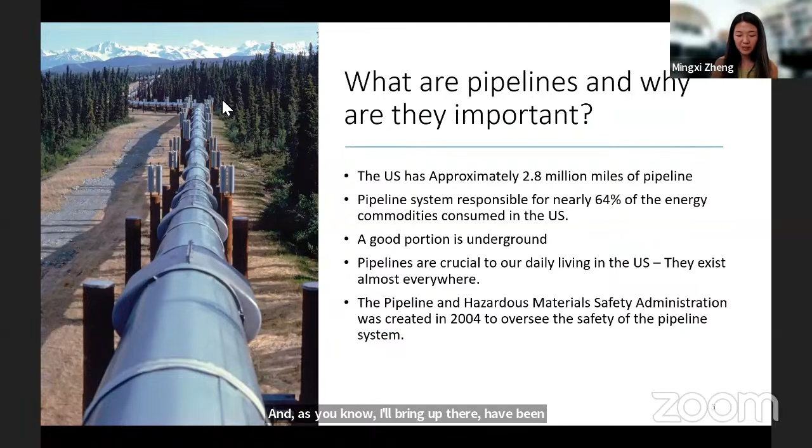So this is a government organization, and their main job is to ensure the safe and reliable operation of these pipelines, and create this check and balance system for it, because they are everywhere. And as I'll bring up, there have been incidences of pipelines causing fatalities and damage. So this here is from the American Energy Mapping.

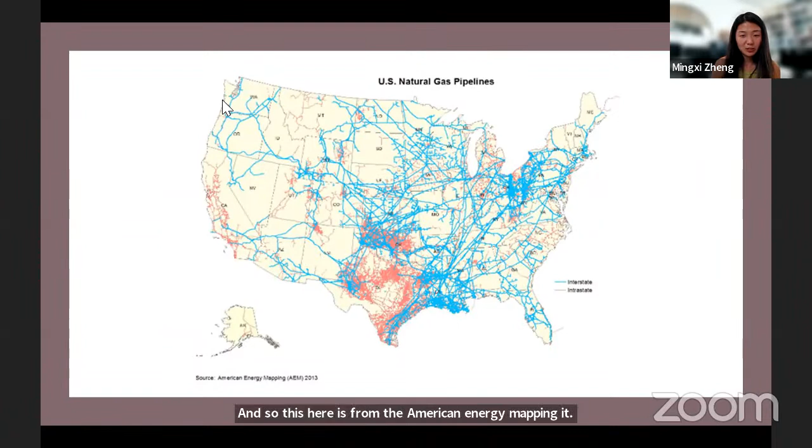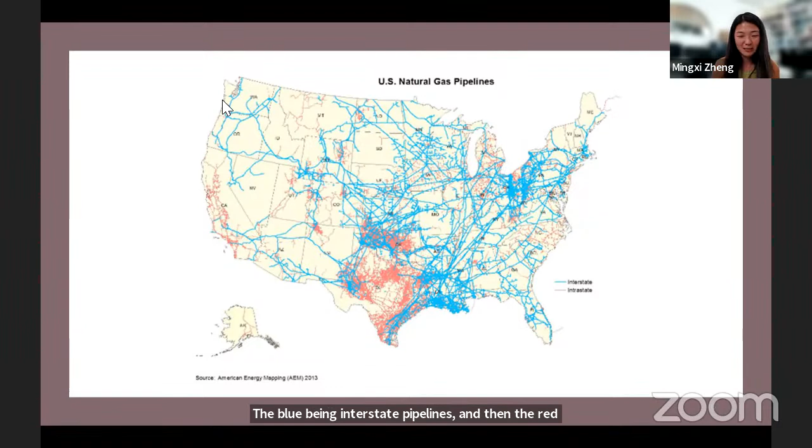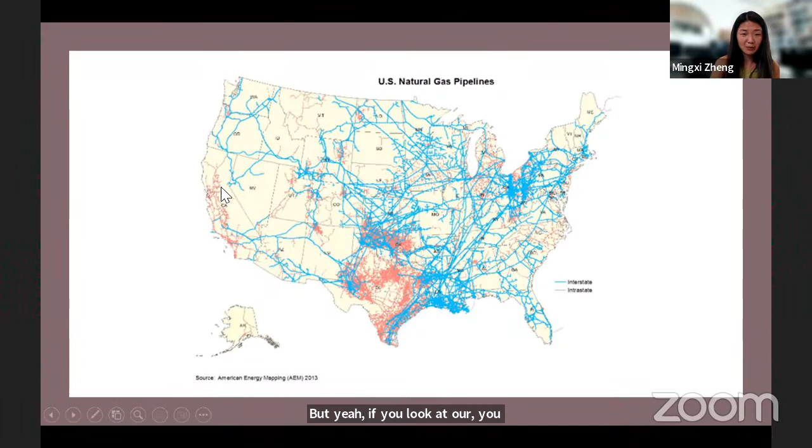It shows visually just how common these pipelines are, the blue being interstate pipelines and the red being intrastate. It shouldn't be a big surprise, but in Texas you can see there's a lot running out of there. But if you look at our little area in California, you also see a pretty high density throughout the major counties.

And to give everyone context as to what we're looking at for your city, this is the map of the specific 3.5 miles running through the city of Brentwood. The pipeline in totality is actually an over 35-mile long pipeline between Stockton, California and Pittsburg.

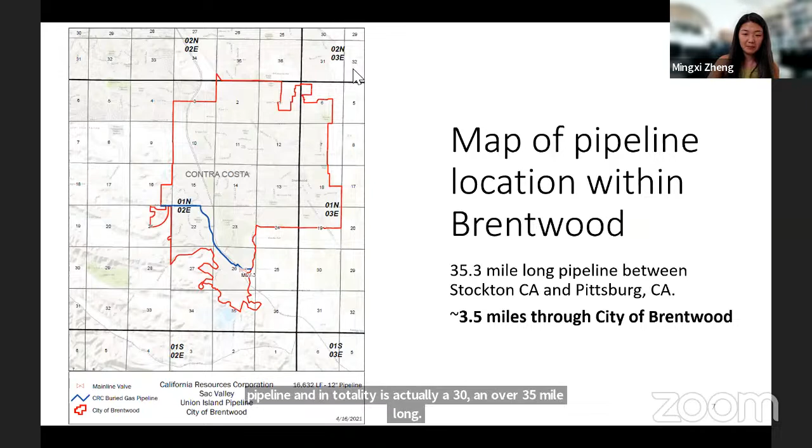Okay, so what should we be concerned about? Why are we here in the first place? Why are me and Glenn reviewing this information?

Well, there's been historic incidents such as the San Bruno pipeline that Glenn mentioned and worked on, that caused a number of fatalities within the neighborhood of San Bruno. What's really important to understand is that a lot of these are due to poor maintenance and inspection practices. So for San Bruno specifically, Glenn, if you want to jump in and talk more specifics, I'll let you go ahead.

This particular pipeline, it's not just weak welded areas. What had happened is there was a section of pipe that was only welded from the outside. The weld on the inside was not complete. That would have been picked up if they did X-ray or the standard hydro test when the pipe leaves the manufacturing plant like they do today. Back then that wasn't done. And despite the weld only going halfway through the metal, it lasted from '56 to roughly 2010. But that pipe would have never survived today. What I mean is it wouldn't have been installed. It would have been caught before that happened.

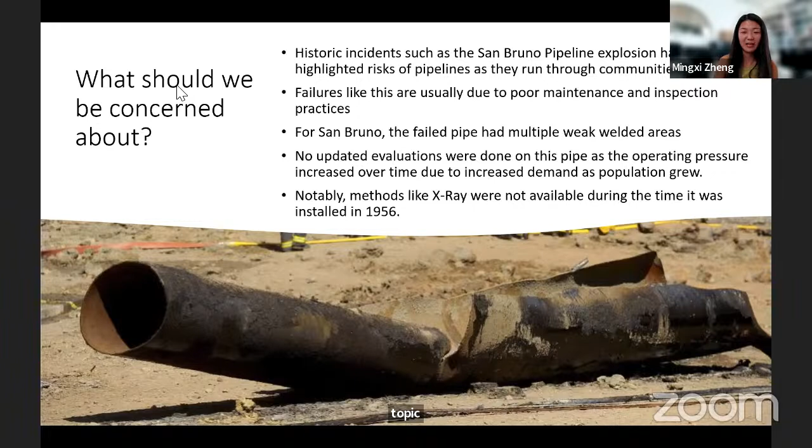Yeah, and I think it's also interesting that this pipe, due to population demand as well, the maintenance and upkeep wasn't considered. But yeah, modern technology definitely plays a big part in catching these things. And that specific topic was something that Glenn and I looked at in reviewing the Brentwood pipeline specifically.

Okay, so I'll jump into the specific pipeline specs. By specs, I mean what is the pipe dimensions, how does it perform, what do we think it should be doing in general. This is where the engineering side of things comes in a bit, and I'll get a little more technical, but hopefully in a way that's digestible.

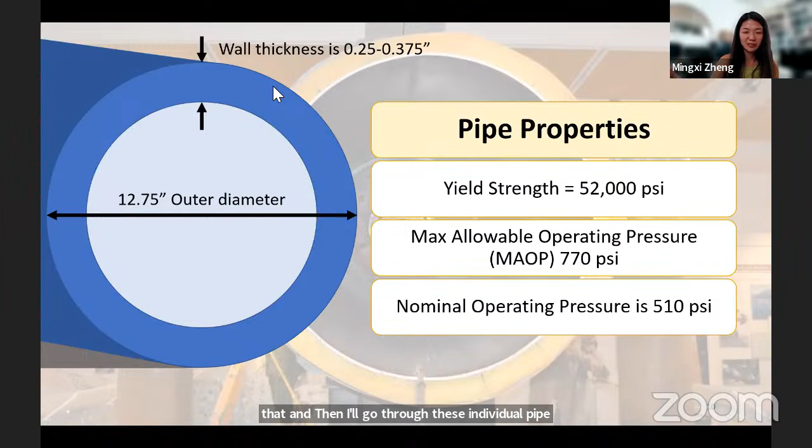So I drew a little diagram here that shows this Brentwood pipeline. The wall thickness is about 1/4 to 3/8 of an inch thick, and then you have a pipe that's about over 1 foot outer diameter. So you can hopefully visualize that. I'll go through these individual pipe properties and give some understanding of what these words all mean, because these are critical to understand.

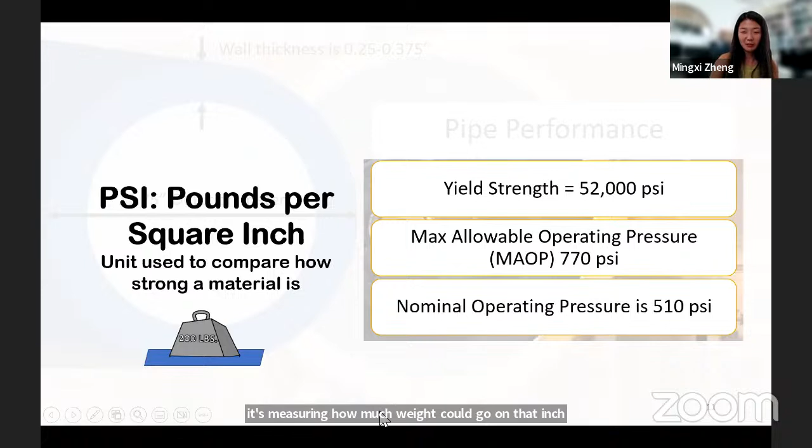Okay, so all these are actually in units of PSI. PSI stands for pounds per square inch. This unit is used to compare how strong a material is to other materials. We need similar units to compare things to each other, and in general certain design criteria that we need to be able to talk about in relevant numbers. So I created this little diagram here. If you imagine just like an inch square, it's measuring how much weight could go on that inch square before certain things happen.

So one important unit for this, this pipe was designated, I'll get into this in the next section, but it's called an X52 pipe, which means it has a yield strength of 52,000 PSI. What is yield strength? It's how much pressure the pipe can hold before it breaks, yields. This pipe could experience this much pressure and still work in this situation. Glen, did you want to elaborate?

Yeah, let me elaborate a little bit. Yield strength is when the pipe first starts to stretch permanently a little bit. Now, this particular pipe, because of its grade, is what we call a strain hardening material. Its ultimate strength is actually 66,000 PSI, so it can go to a strength level 27% higher than yield. And because it strain hardens, if there is a weak spot, it will thin and strengthen. So it really won't break when it gets to a stress of 52. It would break when it got to a stress of 66,000 PSI. So it's a very good material.

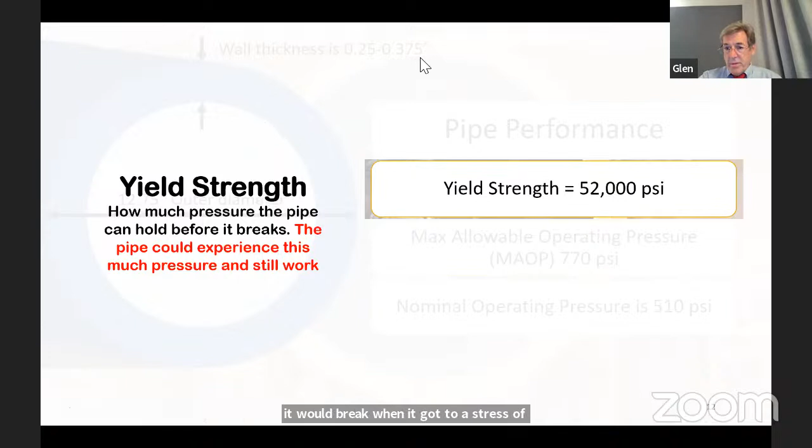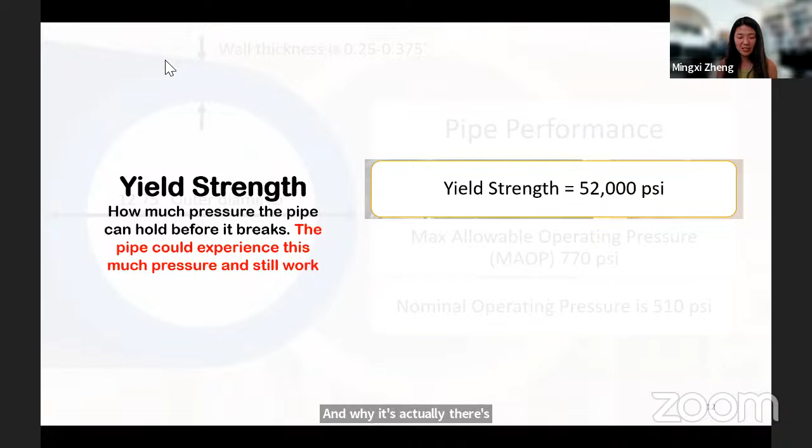That's a great clarification. The word break, I think in engineering we like to be conservative a lot of times, so in our minds we use these numbers to also tell ourselves this is kind of the limiting point of what we want to look at. But yeah, to Glen's explanation, there's all these other details going on in the material and the processing that make it a little more complex. We're going to look at this number because it's the lower number, and it's also going to highlight some other engineering decisions and limitations, and why there are significant safety factors included.

So that leads me into the next specification. This is something called the max allowable operating pressure, or the MAOP. The MAOP for this pipe is actually designated at 770 PSI.

Okay, so this is how much pressure the pipe is allowed to operate with, decided by engineers. When I say decided by engineers, there's a number of calculations going into this, and then added safety factors, which means they'll lower it even more just to make sure it's as safe as possible.

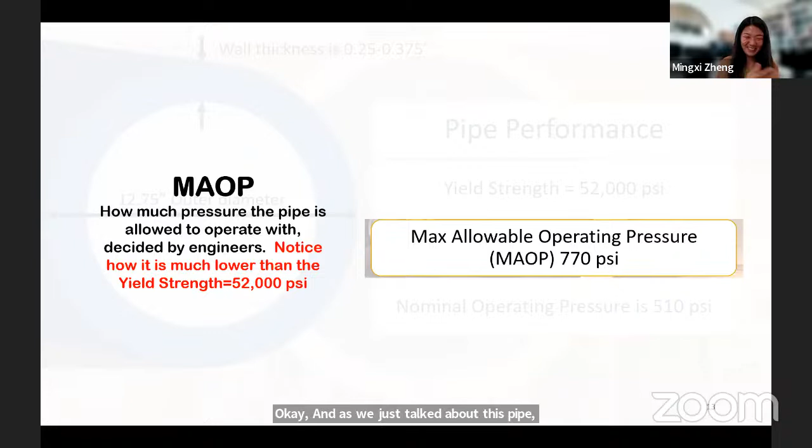So I just wanted to highlight how much lower that is to the yield strength of 52,000. So this is 770 compared to 52,000. Okay. And as we just talked about, this pipe can handle up to 52,000 PSI.

And then one last metric that is important for this specific pipe is the nominal operating pressure. So the nominal operating pressure of this pipe is 510 PSI. So this is the pressure that the pipe actually operates at. This has been measured over all the inspections and various other ways that I'll go over in the next section. But again, notice how it's not only lower than the yield strength of 52,000 PSI, but also lower than the MAOP of 770.

Glen, did you want to add anything else to that before I jump into the inspections? Sure. What this really means is those two numbers, you have to calculate the actual stress in the metal from the pressure in the pipe. It's a fairly simple calculation: pressure times average radius divided by thickness. And when you do that, you end up with a safety factor of just under 3 for yield and a little more than 4 for ultimate, when it would really break. So it's a great deal of safety factor in this pipeline.

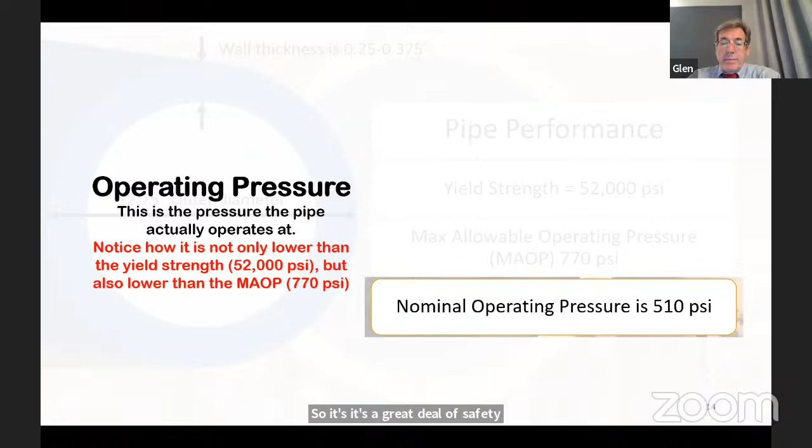Yeah, and then in the next section, that kind of gives you a baseline understanding of what the pipe is, what are the important factors we need to consider in its performance, and basically what we as engineers are looking at to ensure or to understand its performance.

So we did a review of past inspections that have been performed on this pipe by various other either engineering companies or organizations, such as the PHMSA, that are crucial to understanding the current condition of the pipe and to be able to assist in that decision, how you want to proceed with the contracts.

So something I do want to start off with, this is important. Something called API 5L is a specification from the American Petroleum Institute. In multiple different industries, there's all these guidelines that specify how you should manufacture the material and to ensure safety. For example, if you think about your everyday objects at home and a lot of kids' toys, you're seeing there's a UL mark.

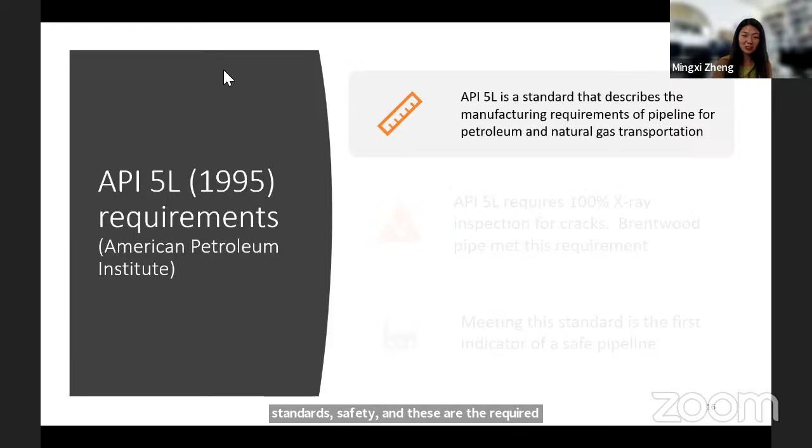I'm sure people have noticed that UL is kind of an example of an organization, such as the American Petroleum Institute, that creates standards to make sure that when you create children's toys, we want a certain standard of safety, and these are the requirements that it needs to follow. So in the pipeline industry, we got API 5L. This is the standard that describes the manufacturing requirements of pipeline for petroleum natural gas transportation, which is the Brentwood pipeline.

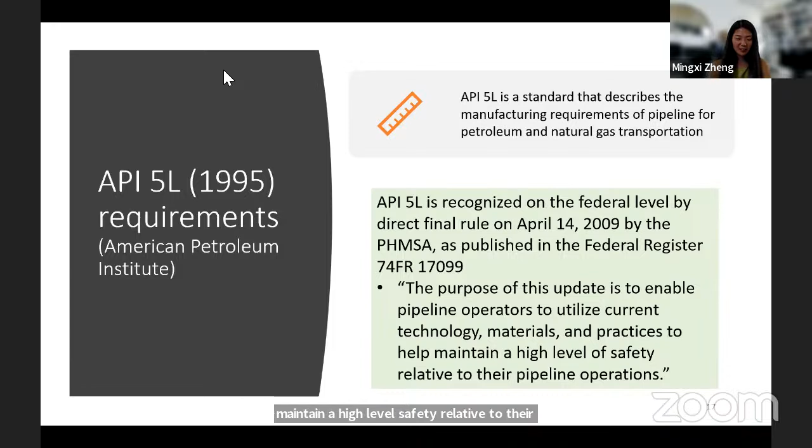The API 5L is actually recognized on the federal level by a direct final rule in 2009, and this was published in the Federal Register. You can reference the edition listed there. They said very clearly, the purpose of this update is to enable pipeline operators to utilize current technology, materials, and practices to help maintain a high level of safety relative to their pipeline operations. So the intention here was to give that guideline to ensure safe operation.

This, along with many other things that are regulating the manufacture of the pipeline for this use, specifically requires 100% X-ray inspection for cracks. Remember, we mentioned earlier the San Bruno pipeline. That technology did not exist, so the issues there were not caught. So this is new technology that is now required by the standard and enforced by that Federal Register announcement.

So the Brentwood pipe was manufactured to this requirement and meets it. Meeting the standard is really the first indicator of a safe pipeline. We have these standards again for the reasons stated that I quoted earlier. And just to give some technical background into what I'm talking about when I say X-ray: it's actually really the same technology as human X-rays. Just like how human X-rays can show broken bones, when you X-ray a pipe, you can also reveal defects like cracks, or show that, for example, in the San Bruno pipeline, if that existed, it would help see that this weld did not penetrate all the way through.

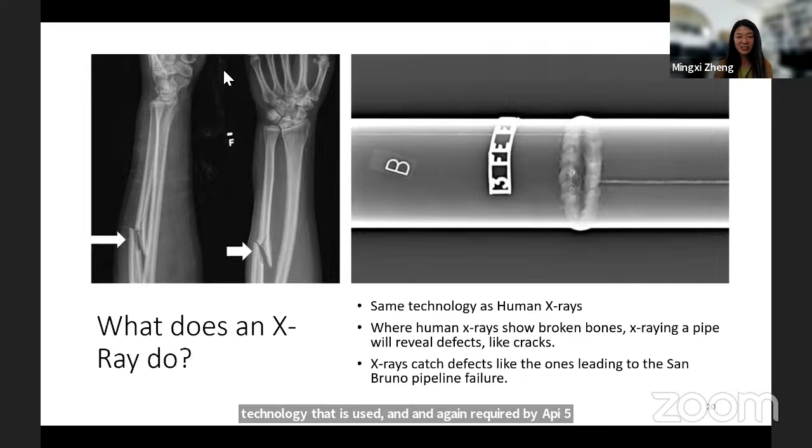So this is now a very modern, familiar technology, but this is an available technology that is used and required by API 5L to catch things before they ever get installed for use.

The next inspection I'll go more in depth into is the Ramsgate Engineering inspection from June 2011. Ramsgate is a third-party engineering company hired to inspect the pipeline, and they actually did their own independent MAOP calculation.

This was a verification based on a worst possible scenario, and they calculated it to be 1,193 PSI. Compared to the MAOP we talked about before, which was 770 PSI, this means they said based on their inspection the pipe could handle pressures up to over 1,000 PSI, and that's with safety factors built in.

So even getting to 1,100 or 1,200 PSI, there's still a safety factor between 2 and 3. They're already incorporating this, and they're calculating a number that shows it could handle more than even the limit already placed on the Brentwood pipeline.

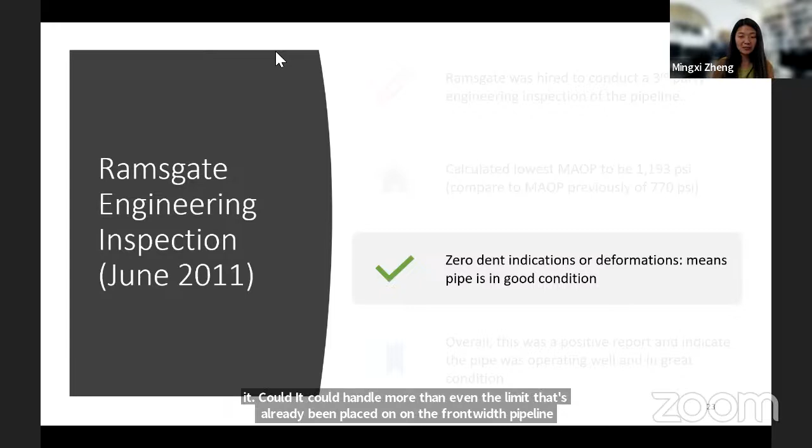Another thing they concluded was that they found zero dent indications or deformations, which means the pipe is in good condition. Overall, they basically stated the pipeline is in satisfactory condition, and in no case does the MAOP need to be adjusted to satisfy any pipeline condition identified by these inspections.

So basically, what they're saying is that this pipe is satisfactory, and they don't see the need for any adjustments to the safety limits or operation limits already specified for this pipe.

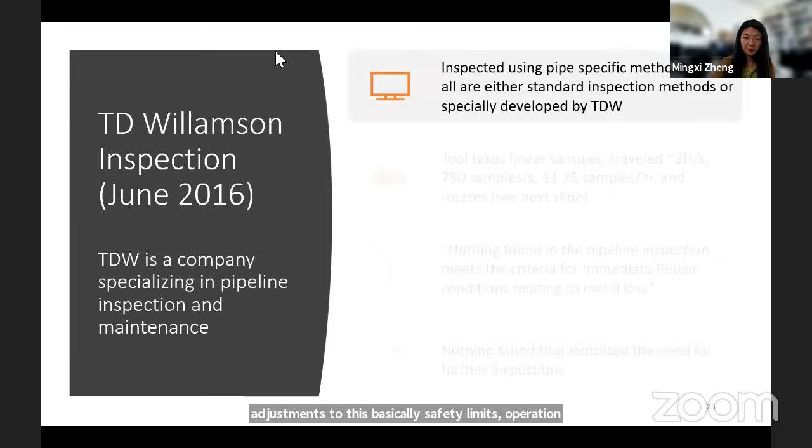One other inspection done even more recently was by TD Williamson in June 2016. It should be highlighted that TDW is a company specializing specifically in pipeline inspection and maintenance. This is all they do.

They inspected the pipe using specific methodology developed for pipelines — either standard industry inspection methods, for example from API 5L or similar, or methods especially developed by TDW, which is kind of their own proprietary technology.

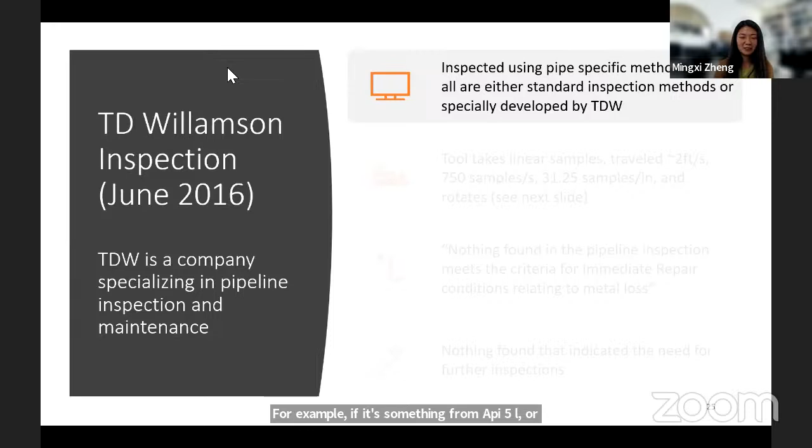One aspect of that is a tool they use that takes linear samples through the pipe. I'll show you in the next slide what that tool looks like, but it's something that is put within the pipe and run through. In this specific case, it traveled 2 feet per second and collected 750 samples per second, which means over 31 samples per inch.

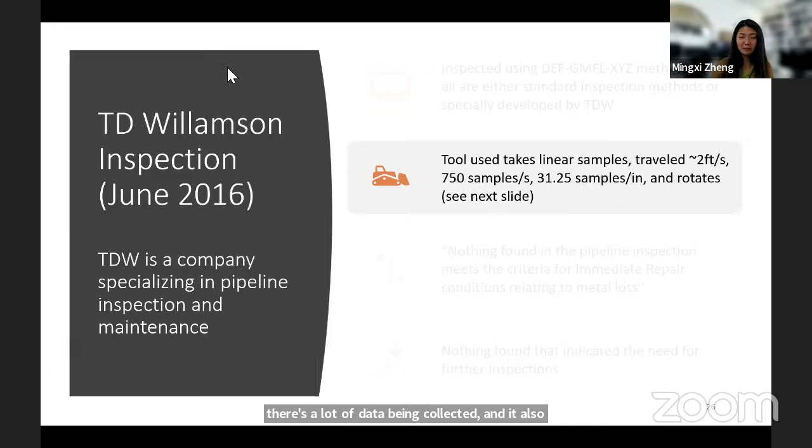If you think about how big an inch is, and then imagine it's taking over 31 samples in that short length — there's a lot of data being collected. It also rotates through the pipe, checking radius and thickness every time it takes these samples, really getting the integrity of the pipe.

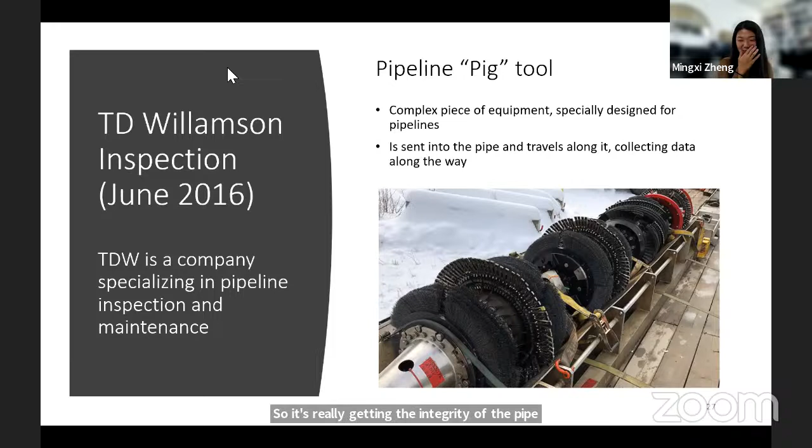That's a great point to highlight — what it's collecting is measurements relating to metal loss or indications that would show something that would affect the performance of the pipe.

That tool is called a pipeline pig. It's a pretty complex piece of equipment, especially designed for pipelines, and as you can see, it's not something simple. This is a very high level, sophisticated technology, very specific to pipelines.

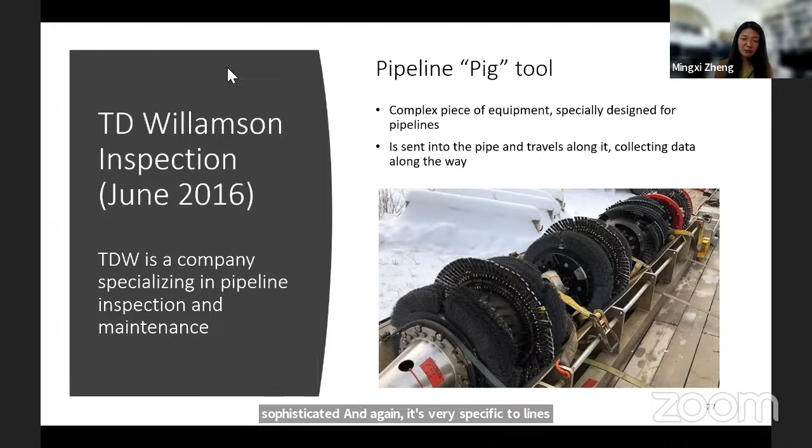It travels along the whole way collecting data, and that data is analyzed by TD Williamson at the end. In their report, they said they found nothing in the pipeline inspection that meets the criteria for immediate repair conditions relating to metal loss — basically, they didn't find anything that indicated they needed repair.

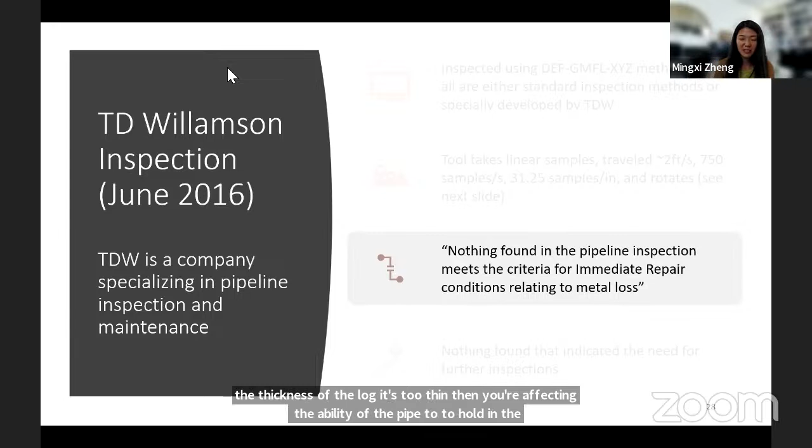This is especially important for wall loss, because one of the big issues in pipeline performance is if the thickness of the wall gets too thin, then you're affecting the ability of the pipe to hold in the pressure of the gas running through it. So basically, this summary says nothing was found that requires further inspection — that's a great sign.

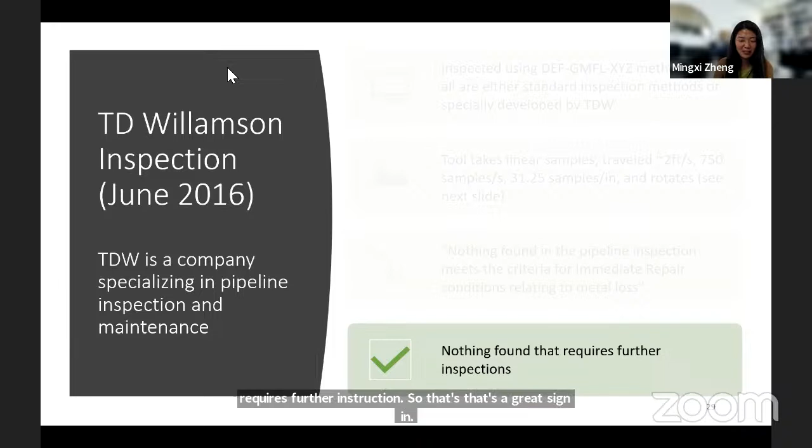Basically they're saying, okay, we liked what we saw, we feel comfortable with it. We actually don't think you even need to look at it more.

And then finally, there was actually an audit in 2018 from the PHMSA. As I mentioned earlier, this is a government organization. It's part of the Department of Transportation, and it's responsible for developing and enforcing regulations for the safe, reliable, and environmentally sound operation of pipelines in the United States.

They were specifically created in response to pipeline incidents, to minimize or hopefully eliminate all that risk. So they have a strong incentive to make sure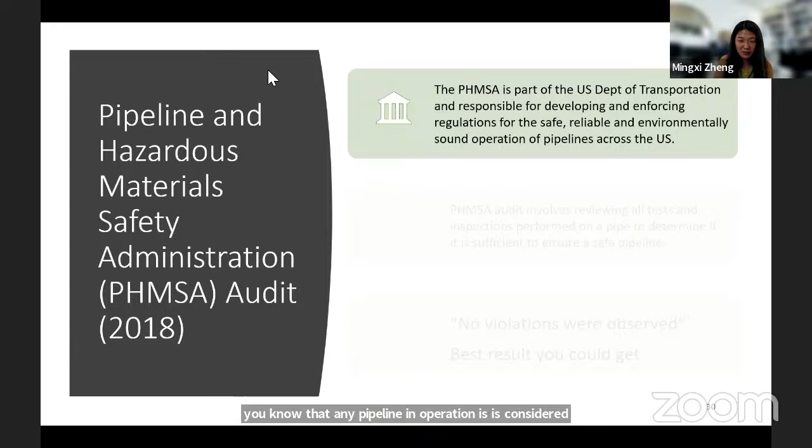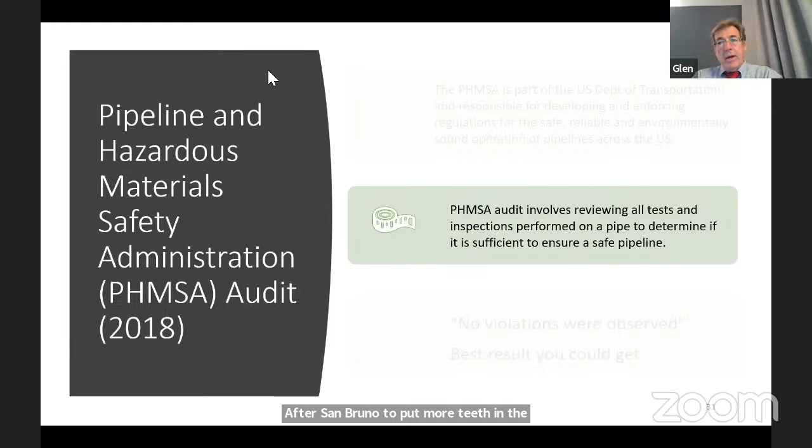that any pipeline in operation is considered safe and sound for the communities around it. And PHMSA went through a very large reorganization after San Bruno to put more teeth in their regulations, and they really are quite rigorous. So this audit involves reviewing all tests and inspections performed on the pipe, in a way similar to what we are doing as well.

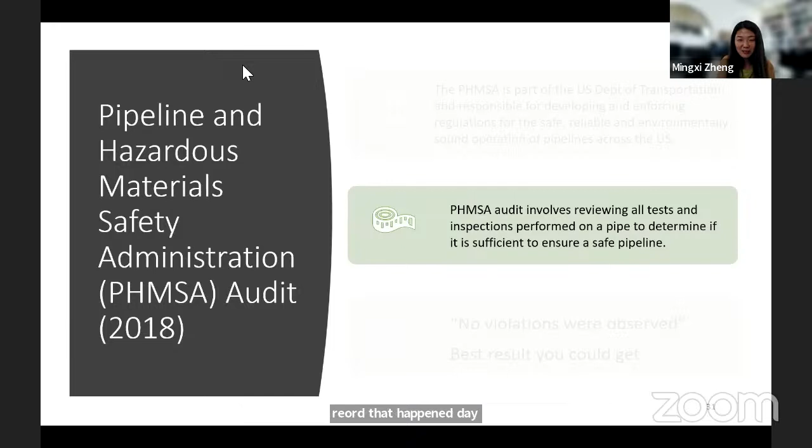They're very thorough, like Glen mentioned, especially after San Bruno. And look, this audit happened significantly after San Bruno, so this audit was also benefiting from that reorg that happened. They want to make sure that something like San Bruno doesn't happen again.

And in an email they shared with the city, no violations were observed. So really I think that kind of explains itself.

So, conclusion—this wraps up. May I ask a question on that?

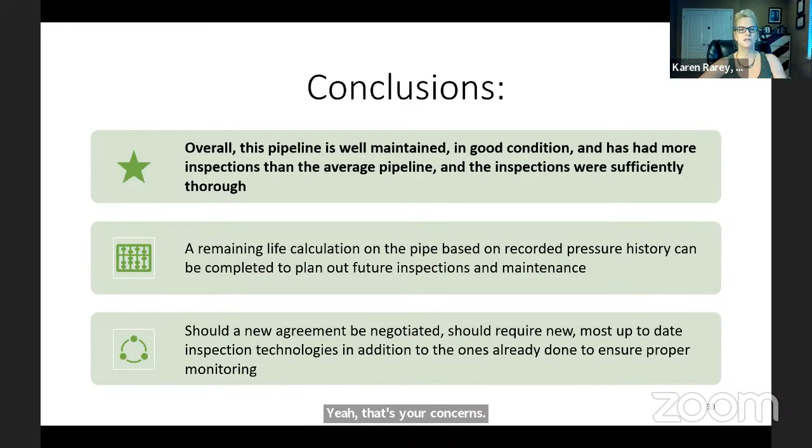It actually says that there were 2 items found in the TDW report on our agenda, page 407. Yeah, the 2 concerns. Yeah, there was 2 concerns of immediate repair. So how can you come up and say that it says there was no concerns for immediate? There was no concerns for a 1-year repair, but there was 2 for immediate repair.

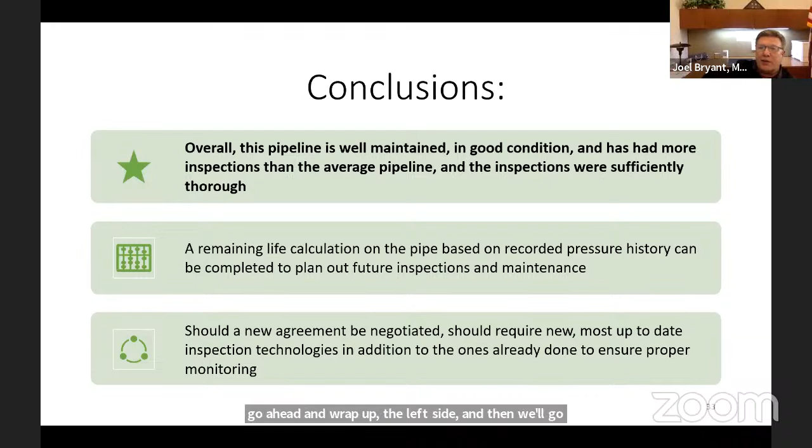Do we want to leave this for after I wrap up this last slide? Go ahead and wrap up the last slide, and then we'll go into in-depth questions. Sure, yeah, okay, so wrap up.

After reviewing all these metrics, all these inspections that we were able to get access to, this pipeline is well maintained, in good condition, and has more inspections than the average pipeline, which Glen can personally attest to from hands-on experience. And the inspections were sufficiently thorough. These were done by professional engineering companies, not only having the right equipment, but the specialty in pipeline inspection.

A remaining life calculation on the pipe based on recorded pressure history can be completed to plan out future inspections and maintenance. This is something that I think is important too, that you're doing this over the lifetime of this pipe. So this is an added option—with the information you have, you can actually do predictive calculations to ensure that you're performing specific or sufficient future inspections and maintenance.

And finally, should a new agreement be negotiated, it should require new, most up-to-date inspection technologies in addition to the ones already done. So for example, X-ray is now kind of a default, but technology is always being updated and innovated, so that should be considered to ensure you're getting the best information possible.

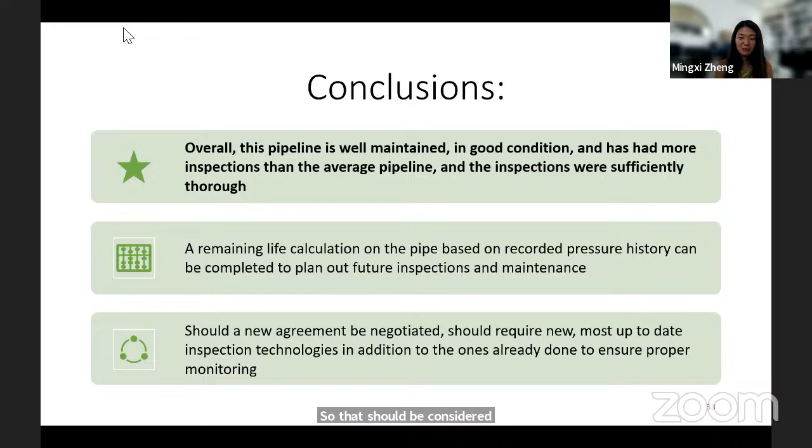For the presentation, Councilmember Meyer. I'm happy to let Councilmember Rarey go first if she wants to ask that question. Yeah, would you mind?

So on page 407 of the report, our page 407 of the agenda, it says DENT, immediate prioritized repairs, GAS in parentheses. There are two conditions, 1B, a dent that has an indication of metal loss, cracking, or a stress riser. Yet you said that there was nothing for immediate repair. How can the report say one thing and then you report that it doesn't include that?

I am trying—they actually did the repair work. I think that one was the Byron one, or that may have been the Antioch one? This is page 17, let me look at what your page is on here.